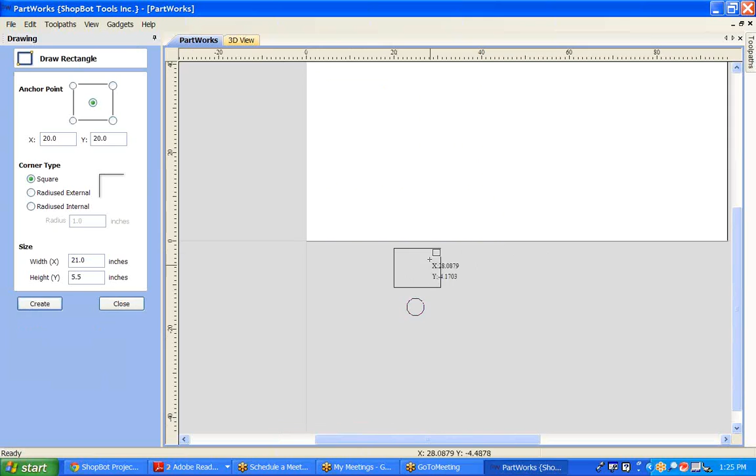Sitting on that stool, I know right here 0,0. Here's the corner of my machine, the front. Here's where it's open in the Y, where you load your material on, and then it lays across right there. So that's been helpful too for getting set up for orientation at first, because there's no fun to have drawn this. Say you've drawn this nice project like this up and down. You drew it here, but then when you actually go out, your plywood grain goes that way, and you've got it laid out there like that, and you're up here cutting in no man's land, and you just wrecked your sheet.

Dust. What's the dust question? I just see dust. Oh, dust on the computer.

Yeah, it's inevitable. Unless you have some kind of a housing or something away here, the computer does get trashed. But after every cut, I usually blow off my table and clean it off. And I just take my air hose and blow the computer out too. And really, too, if you're looking into computers for operating your machine, you don't need anything fancy. You want something basic that'll run the ShopBot software, run PartWorks, in case you got to change something real quick. But you want everything else off that. You want the screensaver shut off. You want the internet shut off. You don't want anything Wi-Fi going on. All that stuff is just a way for you to get a disconnect and a headache and angry. So I shut all that stuff off. I turn everything off.

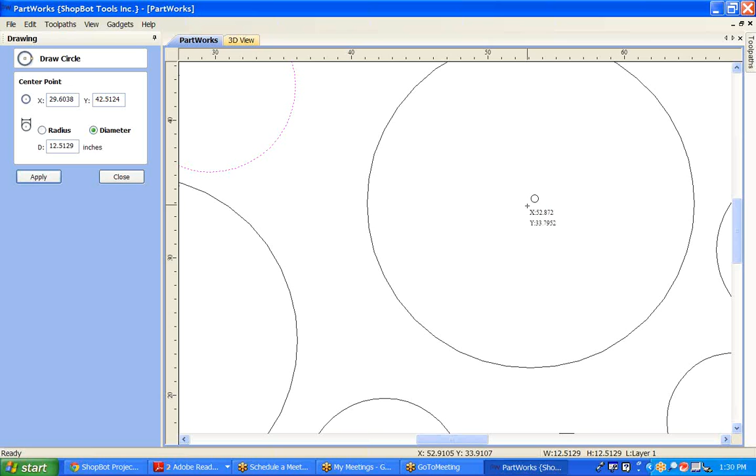I'm also able to zoom in to a circle, and if I hover over the center of the circle, see how it changes to a bullseye. Let me do it on smaller ones, a little easier - see how it switches to that bullseye? Now I can drag that up, and it perfectly centers it in there.

So that's nice, but say I drag this one and I want this circle to a specific size. Even if I've completely let go of it, I can always click back on a circle, go back up to draw a circle, and give it a specific size. I needed that at 5 inches - I can hit 5 and hit apply, and it'll change it for you.

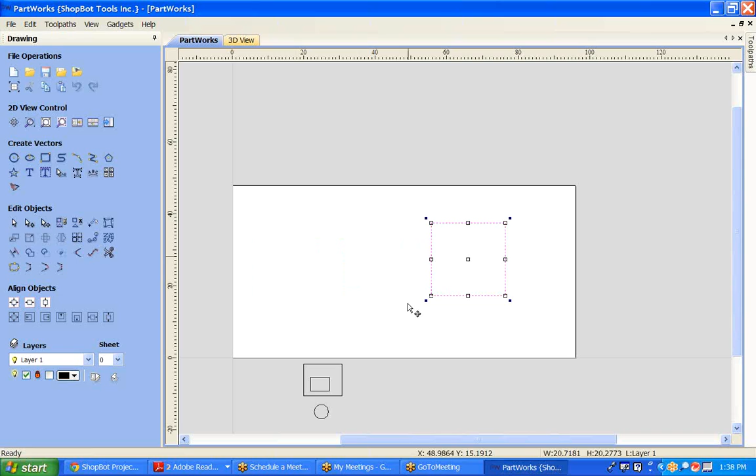This is one of my things that really gets overlooked a lot down here, just align objects. Say we have just a random rectangle drawn. I think I hit create twice there, so let me double click and move it to find out. Nope, okay, and here's just some.

I can cover your triangle question by doing it like this: Polygon, I can just say 3 sides, and boom, it creates my triangle. We can come back to that one - that's just a 3-sided polygon, the triangle.

So say I've got these multiple shapes and I want to align them up with each other. Down here in align objects, your top 3 options align objects in the material. So if I click on an object and select center in material, bang, it centers itself right in the material. But say I have this object down at 0, 0.

And I'm trying to get this triangle located in it. I could be sitting here with my arrow keys getting it close by eye, but there's no way I'm going to get it exact. So that's where it's nice to have these other align objects - these are for aligning objects within each other.

The way these work is: I want to move the triangle, so I select that first. Where do I want to move it to? I want to move it to the square. So with the triangle selected, I hold the shift key down and select the square. Now I come over here to align objects and find the one I want - do I want it to the top, the bottom? I actually just want it centered. So bang, it puts it perfectly centered in the middle. No matter the size of the shape, complex or not, you can do that.

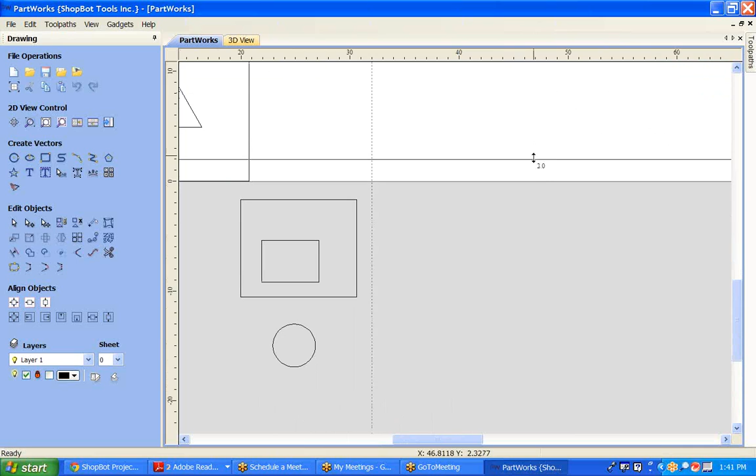So now this is nice - I like this one for setting borders around my material. Like I know I don't want to cut within 3/4 of an inch or 1 inch of my material, so I'll come in and put these all 1 inch off. Or I know this is 48, I'll set it at 47, and I'll set one at 95. So now when I'm drawing, I need to make sure I'm keeping this drawing down inside these, that way I've got room out here for a hold down.

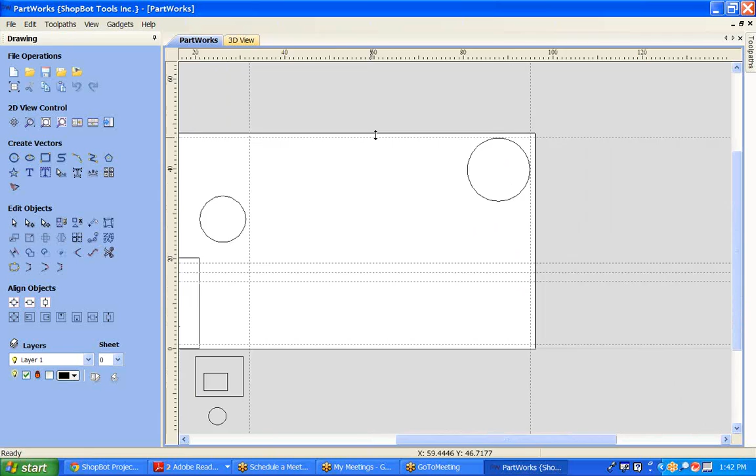So I think that answered some of your guys' drawings. And layout lines - you get into doing layout lines and stuff too to help get things exact.

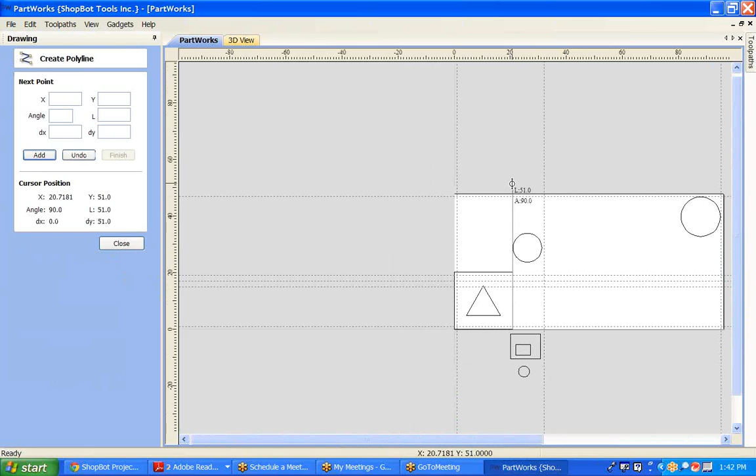If I wanted the circle on the same plane as this rectangle, I'd draw a line from the 0 point. Now instead of drawing this reference line where I want it, up at 90 degrees, and trying to fidget this guy over to get it lined up with that line, all I would have had to do was not even bother with the line.

I'm sorry, the delete key is in a different spot on this machine, it's my page up. So we'll just delete this out of here. All they would have had to do is say, hey, I want this guy brought over to that edge, depending on where you wanted it. So you can move it around to so many different spots - it's just the align objects function.

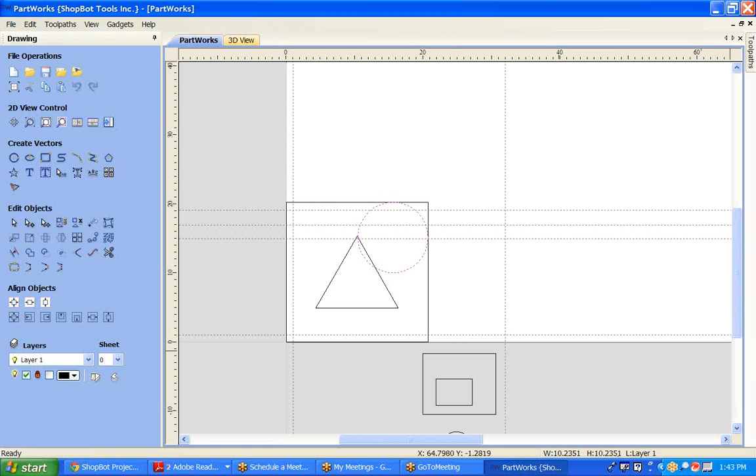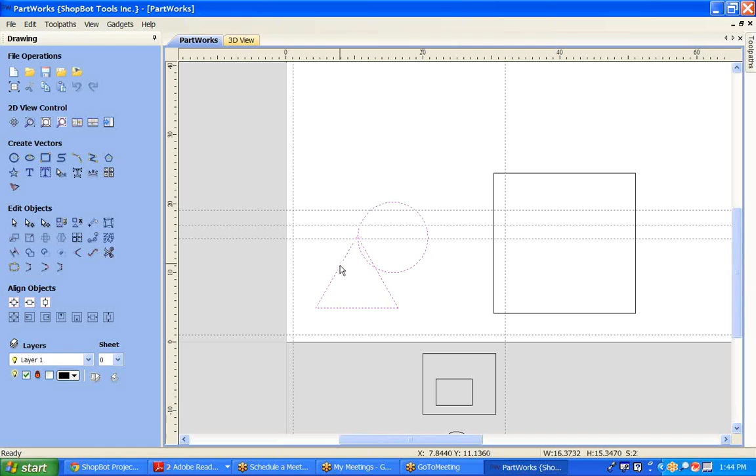Okay, what if the circle is sitting on top of the triangle, and then you want them centered in the square? I think this is what you're asking - you want what if the circle is sitting on top of the triangle. So let's make the circle, get it centered, and get it on top.

So for this one I'd actually have to get these layout lines out of here. I come in here with a quick drawing line, grab the top of this, come across here at a 0 angle, just a random length, just a drawing line. Now I'm going to say circle, I want you to go to that level, down, and now I want the circle to come over and be centered left and right on top of that. Then just go in there and get rid of that drawing line. So now they're exactly on top of each other.

Make this a little bit bigger so it fits. If you're going to move these together now, you're going to want to group them together. Watch, if we do this and say move over to here, it's going to put them like that - I want it to stay on top. So what I would actually do is highlight them, and this is where you'll see over here we have 'group selected objects', or you use shortcut keys from the 200-page manual we've all read. Actually just hit group those together, and then center them in there.

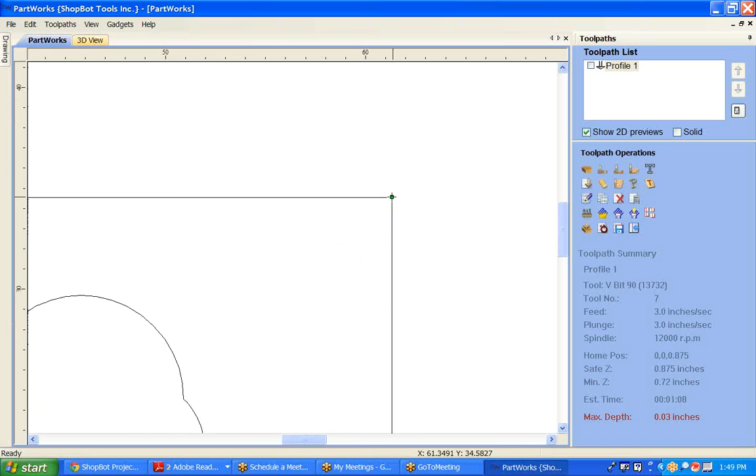So what it's saying is, if I went and toolpathed this, say I was going to give it my profile toolpath, and I preview it, it actually starts it up there when it previews it out. So this is the start of that toolpath right here. It's saying it's going to start here and then move around.

So sometimes you want to move the start points to certain spots. That's where you go in here and say, I really want it down here in this corner. I can right-click on it and go Make Start Point.

Notice in here too, even in node editing, all these little quick commands, S for smooth the point, C for cut vector. Until you have these memorized, go up here into the help contents. I haven't read that any more than the rest of us read the whole thing, but I do know if you navigate down to node editing, it gives you a printout, an option where you can see all these.

What I've also done is gone to the very last pages and I keep this printed out, these quick commands. Oh, there it is for node editing, the IDs, it's all right here. I have this all printed out, shows you how often I use it, and I keep it by our training computer so when people are in here training they can use this. So it's really helpful to go print that out.

But node editing is great. I like to come in here and really get custom with some stuff, make this a Bezier curve, or add some designs to it that you wouldn't be able to do in just a regular drawing.

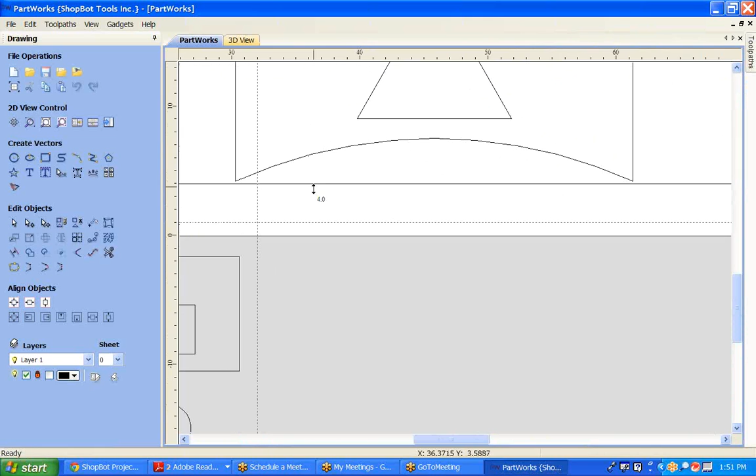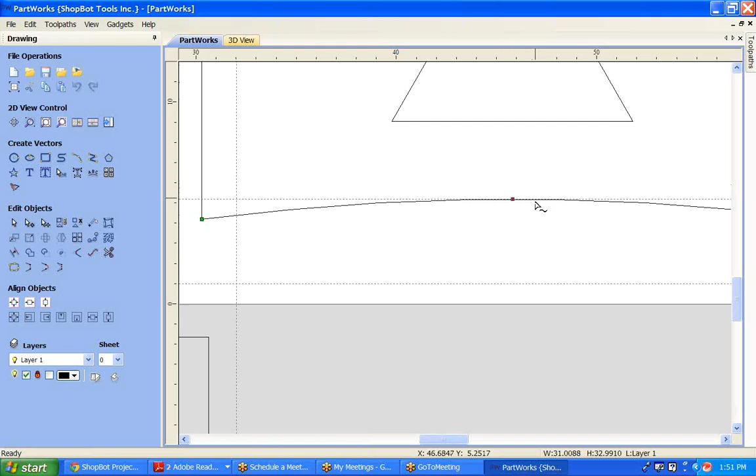Convert to an arc. You can come down and grab this arc and bring it to a specific dimension. Again, you could turn your layout lines back on and have a layout line at the bottom of this, and then offset one up. That's at 4.2, I want this at 5.2, so I know that's 1 inch up. Hit apply, it moves. Say, well, that's all I wanted that arc to have was 1 inch. So I go back into node editing, and I can drag that down to snap, and it snaps right to the 1 inch. So you're able to do that.

Again, to switch back and forth to node real fast is just the N key. So I got the regular cursor, it's pink, I hit N, boom, it switches straight to node. So that's another helpful thing, is that node editing, quickly going back and forth.

Now notice this too. Remember how before I was showing you we can always go back into rectangle and change the shape? I can click on this rectangle and go back in and actually modify its size and position. I can do all that. However, once I've now node edited this, notice how it's pink dashed lines, it's a selected vector. As soon as I go in here to draw a rectangle, it drops that off and makes it black again. Once you've node edited it and changed it, you can't go back to it. You'll have to redraw a new rectangle. You've lost that option. But until you've done that, you can always come back in and modify these.

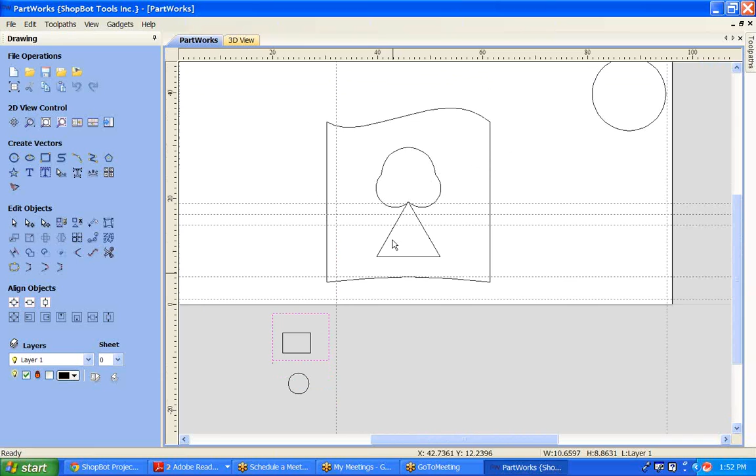I know you wanted to see a triangle real quick, and I kind of did that, but I just went in here to draw a polygon. I could draw polylines and give it specific angles, or just do freehand ones, or I can go into polygons, tell it I want a number of sides and a radius. Set the radius, set the center point, and it pops that out for us. The center of that is 12, 12.

Another feature that kind of gets forgotten in here is some of the math we're able to put in. Any of these fields where we can physically type a number, you're able to do what I'm about to do. So say right now I've got a 6-inch by 6-inch size, and there's my 6 by 6 square.

But it actually needs to be 6 3/16 by 6 3/16. So I can highlight it, go up here, draw a rectangle, and it shows me it's 6 by 6. But I really needed it to be 6 3/16, and I don't have my handy dandy ShopBot mouse pad with all the equivalencies, and it's been so long since I did the 3/16 decimal that I don't want to get a calculator out. You're able to come in here and do a little bit of math. So I can type 6 plus 3 divided by 16 equals, and it pops it out for you. That's a real nice feature.

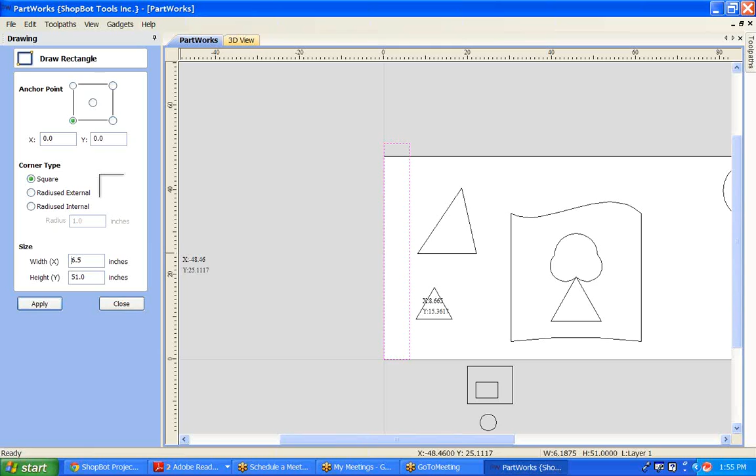Another thing you could do is say you had, I don't know, 4 feet plus 3 inches equals - there, it converts it to 51 inches, and when I hit apply, it brings that in. So you're able to type in different math situations. Like, what would 6.5 be? I can't quite comprehend that today, so I could just go 6 plus 1 divided by 2 equal signs, and it does it for you. It's great, it's awesome, I love doing that. I bet you get into some little fractions and stuff - it's really helpful.

Decimal fraction check, layout lines check. We did some sweep selects and some align objects.

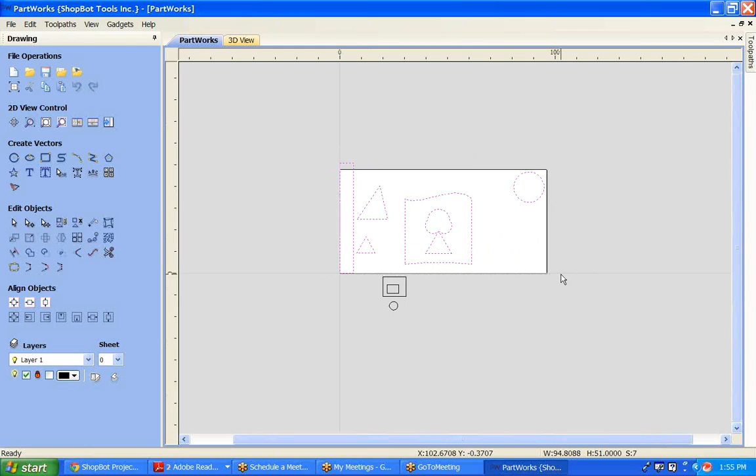All right, we got someone here who wants to see some nesting. So nesting is very nice - the nesting part of the software is very useful. Let's just go in here and create a part that we need nested.

Say I've got a guy that's brought me this random size here. I'm going to go 10 by 10 square, and in the center of this square is a circle - this is the part that needs to be cut out. This hole needs to be cut out in the middle, and then a profile around the side. This part here is what he needs to keep. And he says, here's my design, here's the size of the material I'll be cutting.

How many can you fit in a sheet, and how long will it take to cut it out? Give me some time estimates here - so we're kind of estimating a job. So one thing I want to do is, since I want that part held together, I want these to stay in the same spot - I don't want them moving around within each other. So I can reverse sweep select them, and I can either hit G or come over here and hit group. Now from the pink dash line, they become a pink solid line, so whatever gets modified or moved, it gets modified together. That's one part essentially - they don't ever change.

So now that we've got our actual part, we need to figure out for our customer how many of these we're going to fit into this sheet. And that's what's so nice about having this built into our software - in Edit Objects, if you go down to the second row, all the way over, it says Nest Selected Vectors. You can even see they got creative with the word nesting and have all the letters nested in there.

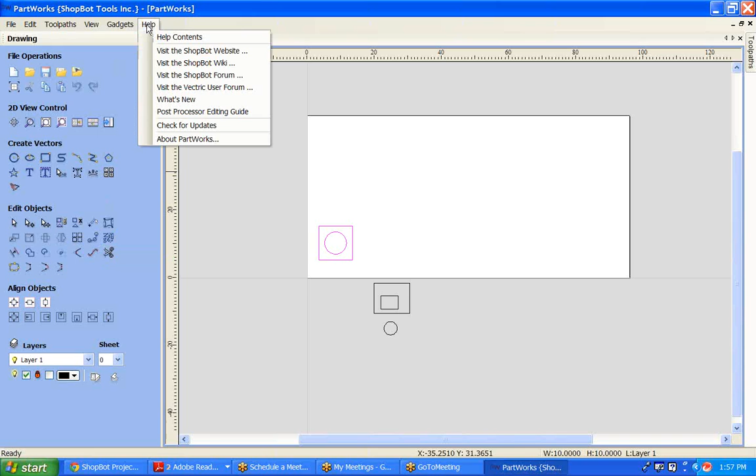There's a great thing about nesting. If you go into Help Contents, there's a whole thing on nesting in here, and there's also a whole thing about it on the actual training site for Vectric that I was showing you earlier. So you have both of those, and what we're going to do right here—if you ever need to go reference it again.

So let's go into nesting, and it's going to run us through a few job setup questions. What size diameter bit are you using? Say we just have a 1/4 inch bit. I can just type in my decimal, or since I can't quite comprehend how difficult that conversion is, I can go 1 divided by 4 equals, and it pops that out right there for me.

Clearance gap—that's what we have to have in between the parts. We know we're going to have several of these, but we also know we're going to have a 1/4 inch bit running around, and we need some distance in between, some material to stay in there. That's where I set my clearance gap. I changed it back—I want a 0.25 clearance gap. Let's say we'll put 3/4 of an inch in there right now. We're going to have a 1/4 inch cutout on this side, 1/4 inch on that, and we need a little bit of space in there to tab.

And then border—how much do we want left all around the border here? I'll just give it 1 inch right now.

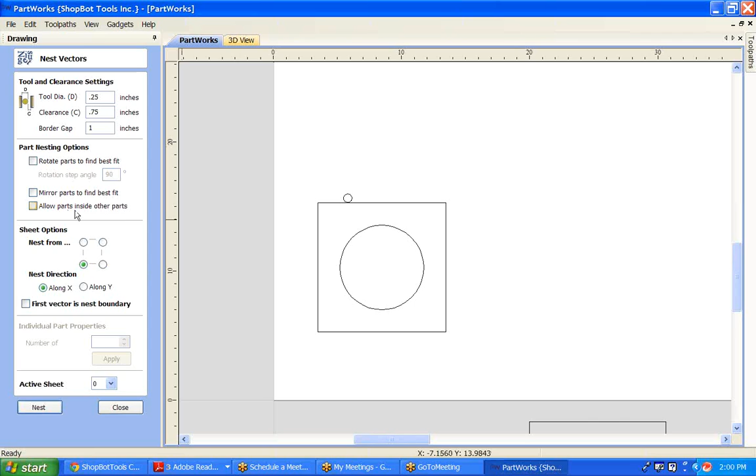And allow parts to fit inside other parts. Say we know this circle right here is getting cut out and just going to get scrapped—maybe we have another smaller part that we need to cut out, and you could actually have it nest inside here. I've done that on several projects. If you go to our ready to cut projects, you'll see the one called the ShopBot Smokehouse, and I needed every inch of that 4-foot by 8-foot sheet. Inside the door cutouts, you'll see some actual parts that have been hidden, nested inside another part. Let me get rid of this part here—I don't need that. And this is the one I wanted.

And right here, this is where you can say where do you want it to nest from. I'm just going to say the bottom corner and nest either in the X or the Y. Right now we kind of need a rough estimate—how many do we think? I don't know, I'm going to say I can get 20 out of here, just for grins. And I have to hit Apply.

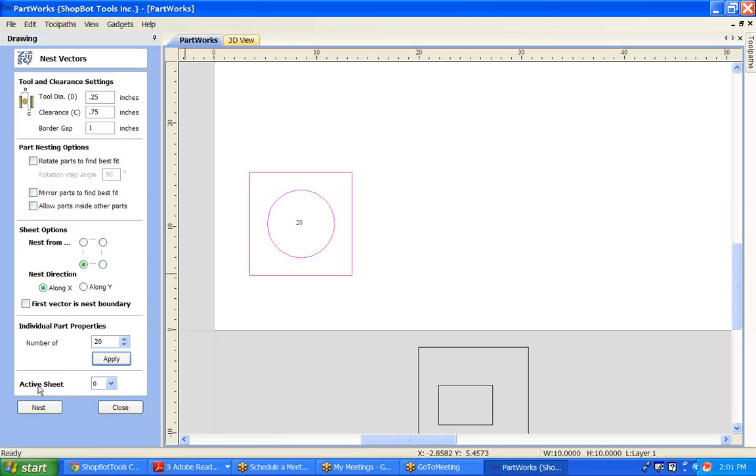When I hit Apply, it actually assigns a number. Now, for you guys watching this in 2013, the new version of PartWorks and Aspire has a preview button right here—it says Preview Nest. I believe it did; I'm trying to remember back to our training up in Cincinnati where I could preview it. Now I have to hit Nest. Oh, no suitable vectors—I need to select the vectors and now hit Nest. So it shows no problem. I hit 20, so I know I could probably get 4, 8, 12 more.

Let's go 15 just to show you what happens if we have too many. I hit Control Z, which is the same as going Edit, Undo, Delete—or undo, whatever you had to undo. And I'm going to actually change this to 35, hit Apply, and then hit Nest.

Now you see I've got sheet 1 created here, and I see that I've got 3 extra ones over here. So I don't, I can't fit that many on there.

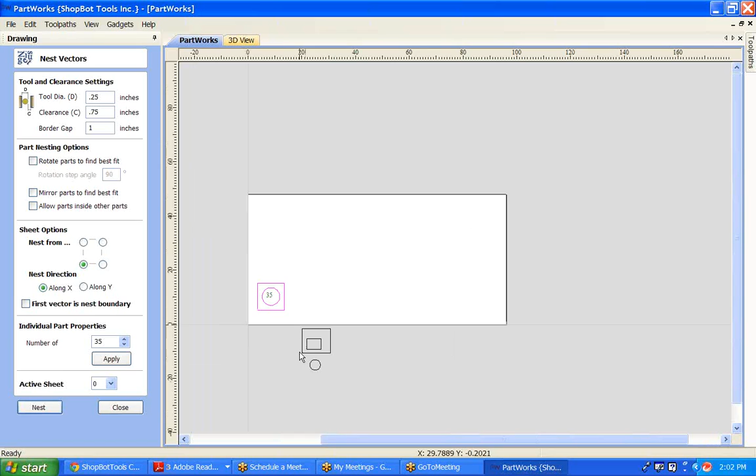So what I would actually do is do it again, Edit, Undo, or Control Z. That's my favorite command on this software, and it's my own fault. So I would actually go in there and type in 3 less, which is 32. Or again, I could do the whole math part. But I got to hit Apply so it changes, then I hit Nest, and boom, there they are. There's my 32, fit perfect.

So I can come now in here, hit Close, and don't forget we have this measuring tool right here, and I can go in here and confirm that I leave enough distance in between. I drag it across. That's 1 inch. Am I okay with 1 inch?

Well, why don't I just draw a quick little thing? I know my bit is 0.25, so I'm just going to drop in a couple of little 0.25 circles to show that I'm going to be cutting out here, and I'll be cutting out here. Look at all that distance I have in between. I definitely am safe, so I feel good about the nest.

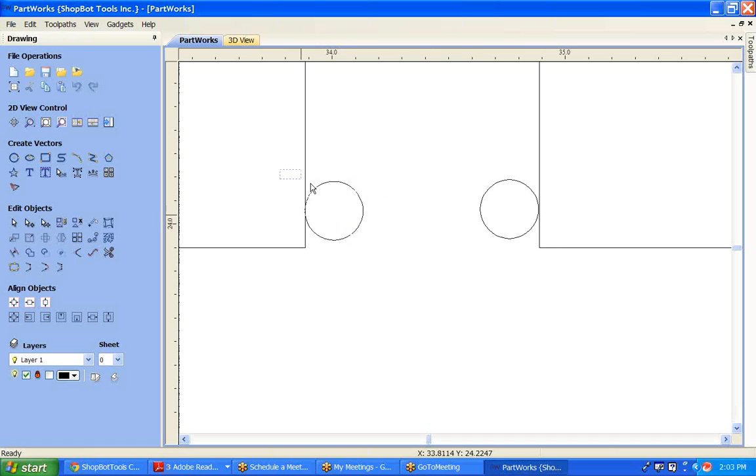But what about this? I could also center this in the part a little bit more. There's no reason to having... I mean, what am I going to do with the 6-inch piece right here? If I don't need that per se, I can sweep select them all, and I can say align and center, and boom, it centers it in. Now I've got plenty of room around here for hold down.

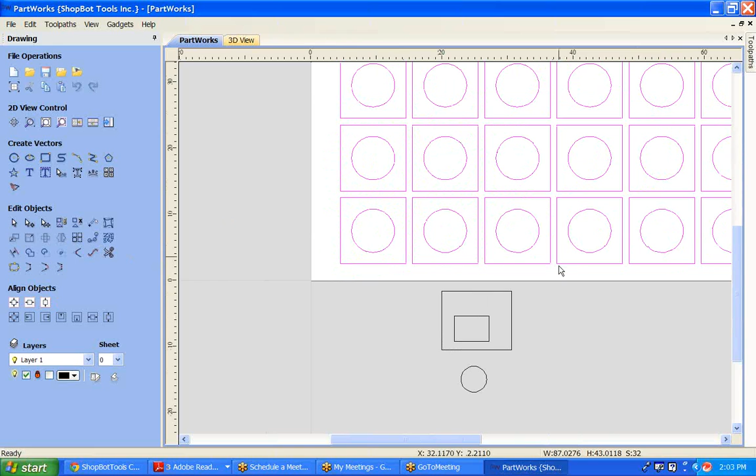Or maybe I need some hold down in the middle, and I know I've got room to spare, so maybe I'll just take this half and use my arrow keys and nudge these over, and maybe grab these here and nudge these over. So now I've got plenty of room in between here. In between here, I could run some screws in if I had to do some hold down.

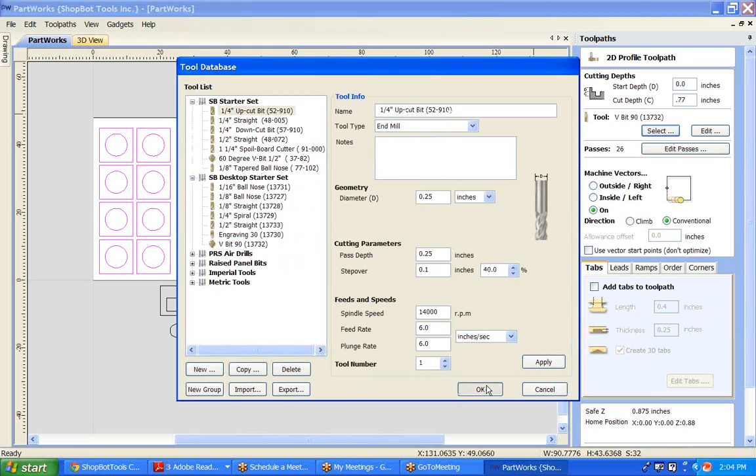And then from here I would go—and I'll come to the tool pathing later—but I would just quickly put a tool path to this. I had 0.75, go a little bit deeper, select, I said a 1/4 inch, and say I set all the parameters up exact. I would run it, preview all the tool paths, make sure I was happy with them, and get an estimated time. About 28 minutes to do that many pieces.

So again, I didn't get into specifics of adding tabs or ramps or any of that. It's stuff we can come back to, but just to give you a gist of nesting. So that is the nest. Sometimes nesting will do the best for you and fit parts. Sometimes I've been able to outsmart the nest and actually do the nest and then sneak in a few more parts. But in this case, it did a perfect job and got our parts in there.

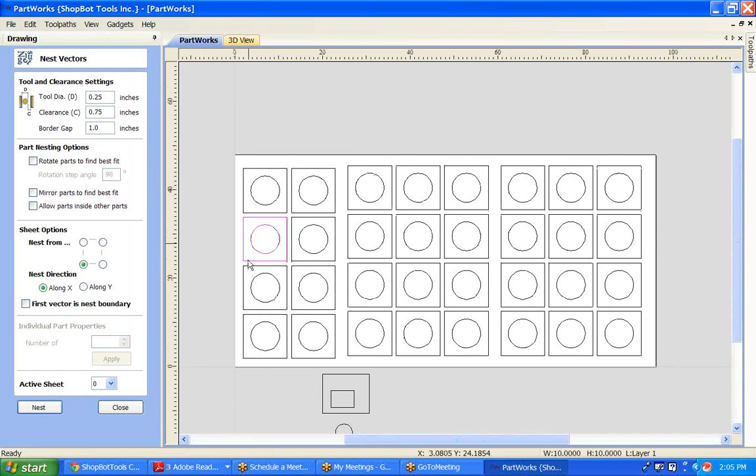So that is nesting. A couple of drawing commands get overlooked a lot and forgotten, but are still somewhat useful. Say we wanted to make a sign with multiple shapes in it—this one I find gets overlooked quite a bit. So there's my long part of the sign, and maybe I want to have some sort of a circular part in the middle.

And I can just sweep select them. I can have them centered. I didn't quite center the way I wanted it, so I center that in the middle. I center that in the middle.

So here's my parts. A lot of us are used to going over here and using the scissors, which is trim vectors. I would go right here, and here's 1, 2—whoops, I don't want that, it trimmed it right off. That trims it off too. I'm just hitting here, undoing and trimming, undoing and trimming. It can be a pain sometimes.

What is real nice to have is I can just have both objects selected, and you can come down here to weld selected vectors, subtract vectors, or keep overlap. So if I weld selected vectors, bang, that's just become my one new design right there, which is really useful. Now I could come in here and add my stuff as text or 3D or whatever I needed to do. So if I do an edit undo, let's see what happens on these other ones.

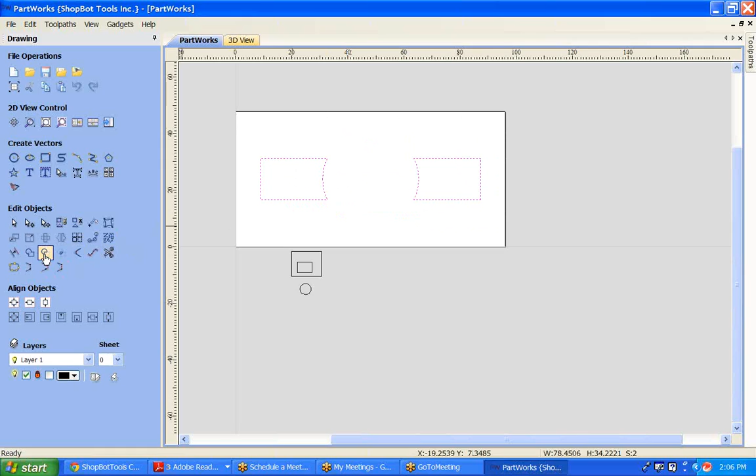Now that was the subtract vector, so it subtracted where they overlapped. And this one here would be keep overlap. So just some useful stuff to remember, things that get overlooked and forgotten.

So, weld selected vectors. I got a question here that says, can a PartWorks file be saved as a DXF? So yeah, this is my project right here, let's say, and I'm done with this. I can come up, highlight this, go to file, and actually export it out as a DXF right there.

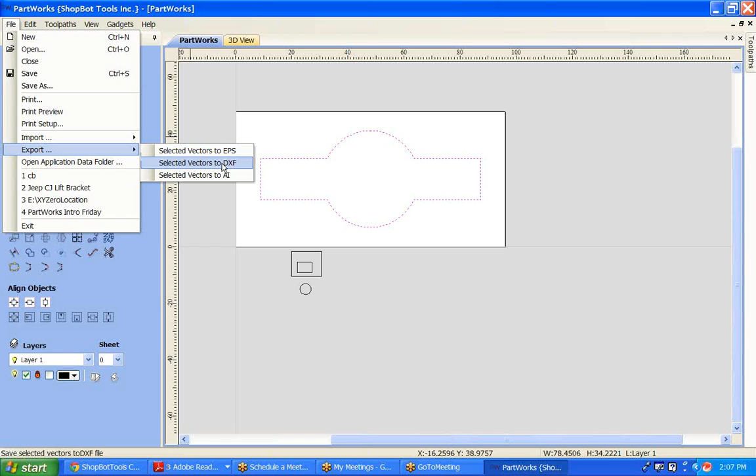I hope that answers your question, Gary. Again, these are all things that we've done in your basic training. You use them, but certain ones just get forgotten. We haven't used them in a long time, or it's just something that maybe is a little bit quicker for you to draw. And some of you guys might have a couple of these techniques that I haven't even been covering that you might want to go over.

Go back to node editing real quick. This is one that we forget about a lot. Say I'm in here and I've right-clicked on this and I've deleted a span. Well, we know that we can also right-click and say close vector with a line, a smooth curve, or move endpoints. So, boom, I've selected it, and I've brought it right back in there.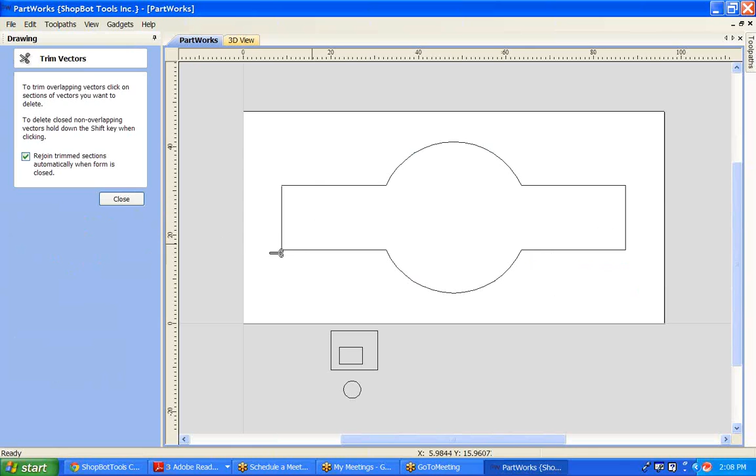Some other ones as we're drawing... oh, it's not going to grab over there. So say I went in here and cut the vector, and I've actually gone and eliminated this part of the project out.

Even not in node editing, there are objects that you can come over here - these bottom three - and join or close with a straight line, with a smooth curve, or to move a common toolpath. So same thing that's in the node, you don't have to go in there to find it, you can do it right there.

So edit, undo, and it just shows the different options, versus me having to come up here. Say I just want a straight line, I've got to draw a polyline. There's a click, here's a click, there's a click. So did I even get the ends right? No. So now I've got to come in here and do a trim, then check - did it get joined, is it closed? Yes, it's closed. Or, what I could have just had was right here - it says join/close vectors with a straight line. So when it's highlighted, it's one click and done versus all the other clicks.

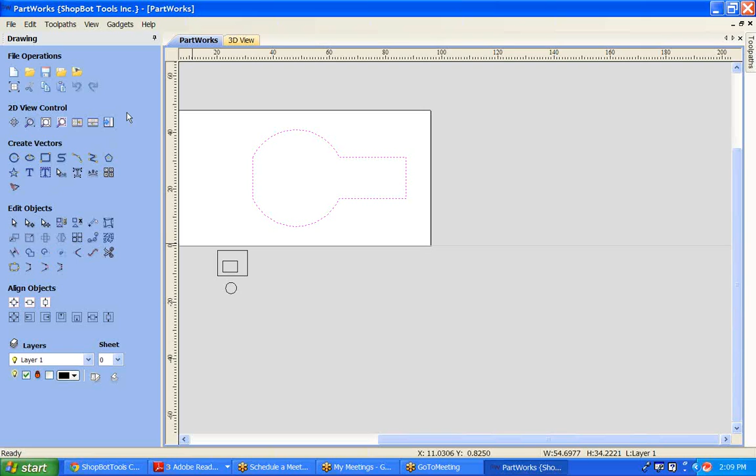All right, let's see what we have for some questions here. I'm working with text and trying to cut profiles of a script that I string together, but I seem to have too many start points and the end points seem too. Text on curve - can you do that with holes?

All right, so we've got some text questions here we're getting into.

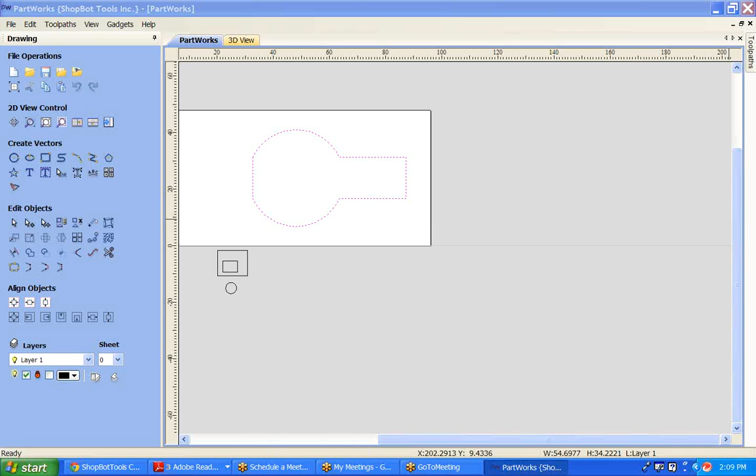So first of all, text can be a little tricky sometimes, and let's just remember that when we're drawing with text - sorry, the computer's loading up - when we actually come in here and draw or create text, what we can do is create the text, give it our specific font, bold it, center it, whatever we want to do, change the height. We can do all that, give it an anchor point. But I'm also, just like I was up here with the circles and the rectangles, able to come in here, move it, and drag it to whatever size. But notice how when text comes in, versus coming in as just an individual vector which is your dashed pink line, it's coming in as a solid line. So text is grouped together, it's already been grouped, so it needs to stay as a group for V-carving purposes. Once it's broken up into individuals, it's not going to V-carve the same.

And I know I'm getting a boatload of questions over here, and I will go back to them. If I've skipped them, I will come back. I apologize, but they are just showing up like crazy in the little chat window, which is perfect.

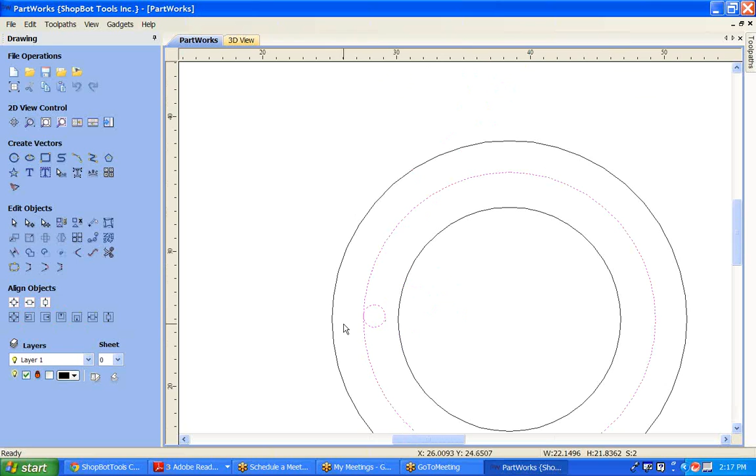That's where I want those. What I could actually do is copy objects along vectors. I could say, copy these circles, give it a number... oops, sorry. Copy those. I want to copy it around this.

I should drop it in there. Oops, I had the size wrong. So this one is actually copying circles, but I wanted to copy the object. So I'd say copy this to this.

Copy the object. I want 6 of them, I want 12 of them. And I hit copy, and boom, it drops them in exactly along there. I didn't even have to line it up, it lined it all up itself for me. So I go in here and delete the original, delete the layout line, and there's my part right there.

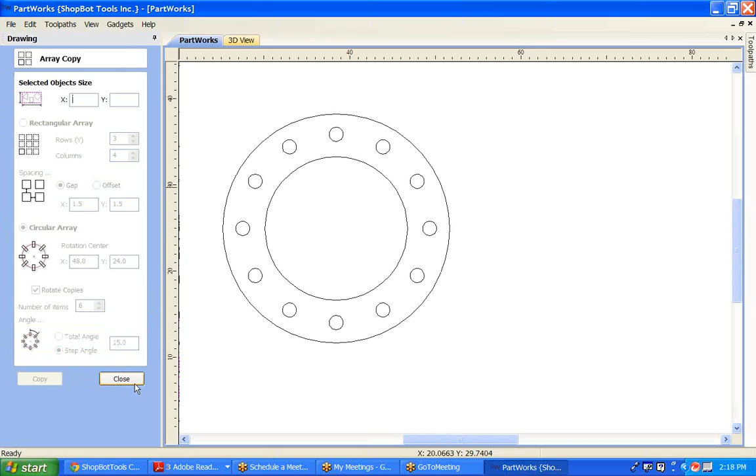You can do that same thing without doing it in a circular array. I could have went in here and, let's say I want to keep this—this is neat, maybe I'll use this for something in a little bit—I just drag it over here into no man's land. It can hang out, it's not hurting anybody over there. Same thing I just did with those circles.

If I wanted to create vectors in a linear pattern instead of circular, I just did that—where did I do that? I did copy objects along vectors. I can also come in here and copy objects in a linear or circular array. So it's a way to do that as well.

We'll do a rectangle for this one. So there's my selected object size. I want to do a rectangular array, and I just tell it how many columns I want. Say I want 6 columns and 5 rows, and I can give it a gap, or the spacing in between the X and the Y—give it an inch in between each. And I hit copy, and it copies those and makes them for me. It's so much faster than having to do any kind of copy and paste.

Some of these I'm going over a little quick. If you want, say, hey, slow down, show that again, just type that into me and I will make sure that I do that. I want to go slow, but I also want to go fast to cover as much as I can for you. You can always come back and watch it again. But I also have no problem coming back and showing this step over again. I think I'm getting a little fast because I've been trying to answer all these questions from getting caught up.

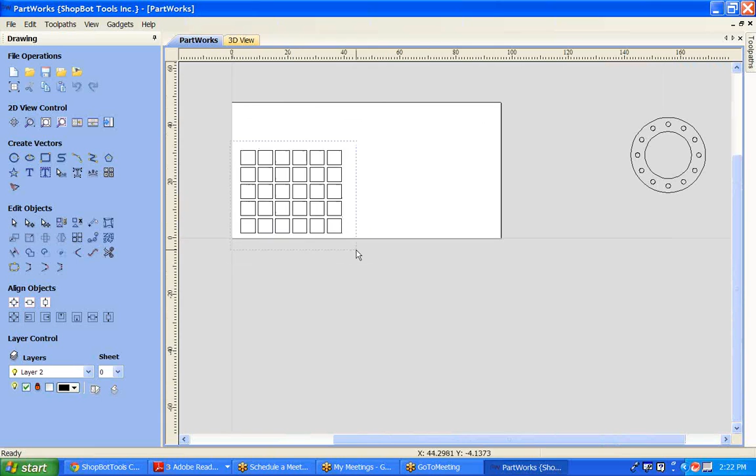So what he's asking is about converting a BMP file to a vector—BMP, JPEGs. What you can do is come up here to import a bitmap for tracing, and I click on this. I'm not sure if this computer has any pictures, let's go in here and see what we got. I think this is what you were asking for. So really what it's saying is it's bringing in a BMP, a JPEG, a GIF, a TIFF, a PNG—any of these different formats. I have no idea what some of these even are.

So I could bring this bitmap in, JPEG, or any of the following, and maybe I just want to trace the outline of the mountains for a background I want to put into my project, a cloud or something. Once I've used this import tracing, now I've got the picture. I actually need to trace it.

So in Create Vectors, go down to the third one, and that's where you can fit vectors to bitmap. Here's where we can pick color, black and white, and let's say I'll go color, and I just want to select with black right there.

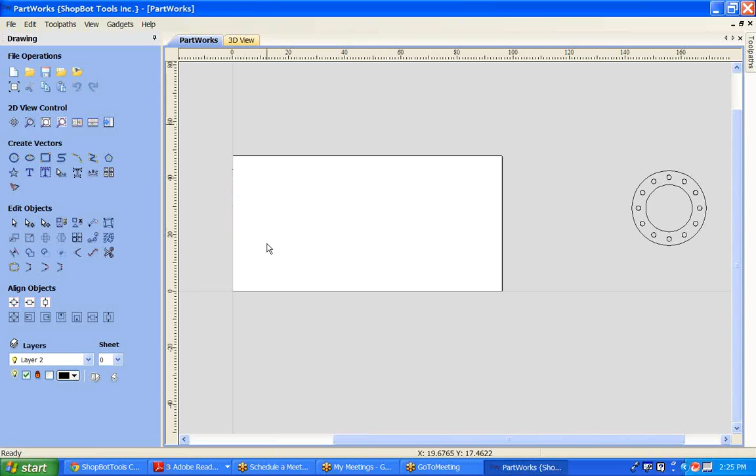What I've done several times is, even like a Google image of some clip art or something, or took a picture. The other day I took a picture of a guitar for a guy, saved it as a JPEG, came in here, imported the JPEG, had the guitar here, went in here and did trace, and it was just a couple colors, and I traced the guitar, and we ended up toolpathing it real quick.

So again, if you want a real detailed training on bitmap tracing, I would go to vectric.com and go down here to support and training material, and it's right in here in the 2D. He's got a great one for tracing and machining images, it's 11.5 minutes, and James does a great job with that, much better than I can do here. So that's where you can get going good with that.

All right, BMP to vector. I think I answered Larry's question. You can choose climb or conventional cut. Sometimes it is useful to do bidirectional, can you do that? I can, I'm going to come back to that when we're actually toolpathing, Gerald. I'm going to stick with the drawing for right now. I'll try to get you there.

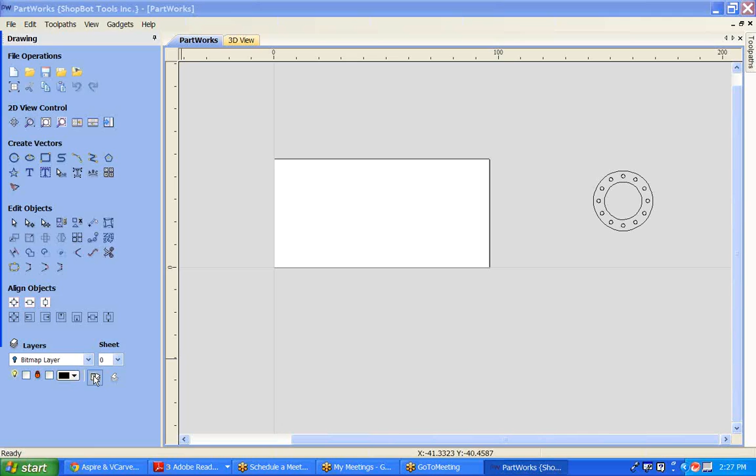What is layer 1 and layer 2 referred to? So what he's asking down here is layers, what layers I'm drawing on. Here's a bitmap layer, which I have turned off, and now the light's on. So you can actually draw on layers. And this, take it or leave it as you want.

It's what works for you. Maybe you have a project that has a bunch of holes in it, so you could actually draw all your holes on layer 1 and then have all your profiles on layer 2, or bitmaps on its own layer. So now I'm tired of looking at the holes, or tired of looking at the bitmap, I could just come in here and say, hey, turn you off. It's there still, I just don't see it right now. Or maybe I'm just done with that bitmap, thing didn't come out right, and I just want it gone. I can just hit delete layer.

Do I want to move to a different layer, or just say nope, delete, goodbye, and it's gone. So that's the layers. I wouldn't get too worried about layers yet. Get a dozen or two simpler projects under your belt before you worry about drawing stuff on multiple layers.

Will there be a class on the new ShopBot control software? Yeah, there will, once it's actually fully released. We have a new version of the ShopBot control software coming out within a few months.

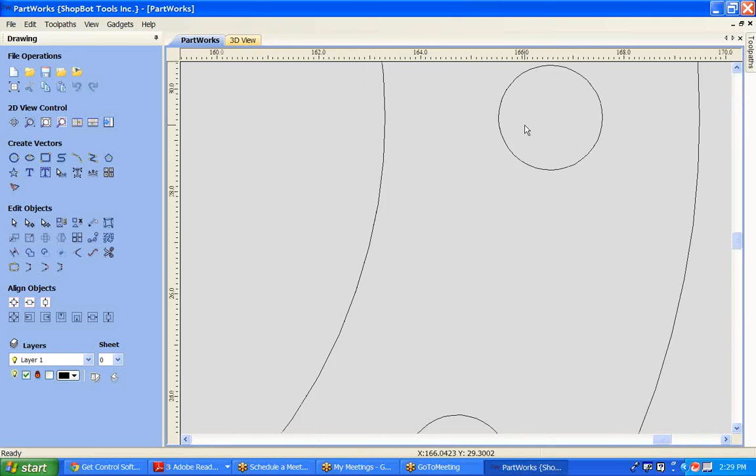This whole zooming and panning with the mouse is key. I'm using my scroll wheel, moving around, panning, scrolling in or out, or holding it to pan. It's real useful. Sweep select, if I want to sweep the whole thing, everything inside gets selected. With a reverse sweep select, it doesn't matter if it's fully engulfed, whatever it's touching is going to get selected.

If I want to grab things one by one, I can click on it, hold the Shift key, and go through clicking one by one. Which is slow. What I would actually do is sweep select the whole thing, hold down Shift, and click the parts I don't want to deselect those. Then I would group these together, or just hit G as a quick command. Remember, there's a help section with 217 pages you all have to read by the next webinar, because the first half hour will be a quiz on the help PDF. Not fair, I have to read it first too, right?

So grouped objects are solid paint, dashed ones are just individual vectors. Any other specific drawing questions? Otherwise we'll move over and do a little extra help on PartWorks, or the toolpath side. Today's session was just some forgotten tips and tricks that you might have used, some things to help speed things up and make you more confident and accurate. It wasn't meant to be an intro to how you draw in PartWorks and go at it, just some friendly tips we've all forgotten.

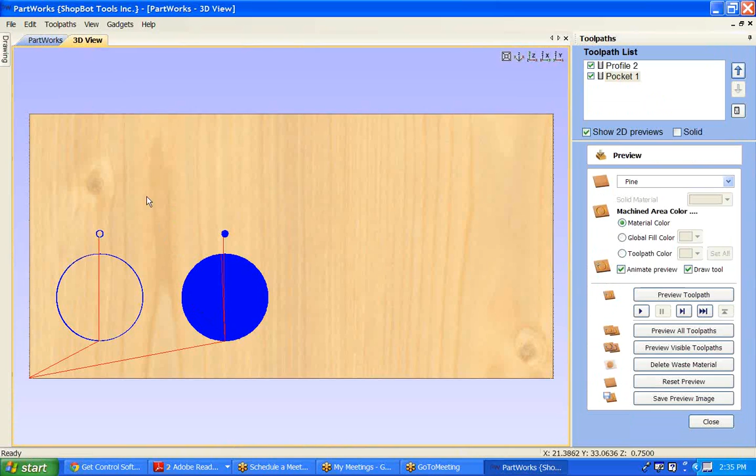Now let's come over here and make these a pocket. I'm actually going to do a pocket of 0.76—I want the same bit that I used. I'm just setting up a little visual here, so don't try to draw all this. Alright, so on the left we've got profiles, and on the right we've got pockets. So just to show you, sometimes you'll use a pocket as a profile for drawing holes.

And this is why, right here. Let's preview all the toolpaths. So as we see over here, the little hole done as a profile pass on the inside leaves this nub of wood. That little piece right there is probably only about a half inch by half inch—it's just a little tiny circle.

And what that is—if you're going to add a tab to that to hold it in place, once it's cut you've got to spend time removing the tab, sanding where the tab was, and cleaning that hole up. Where if I would have just done it as a pocket, it would have already been gone for me. So the pocket's going to take a little bit longer to cut out, but it's also going to save me the time it would have taken to sand this and untab it. And here's the chance of this little tiny piece flying out of there if I forgot to tab it or it broke off—it could chip a bit or break a bit.

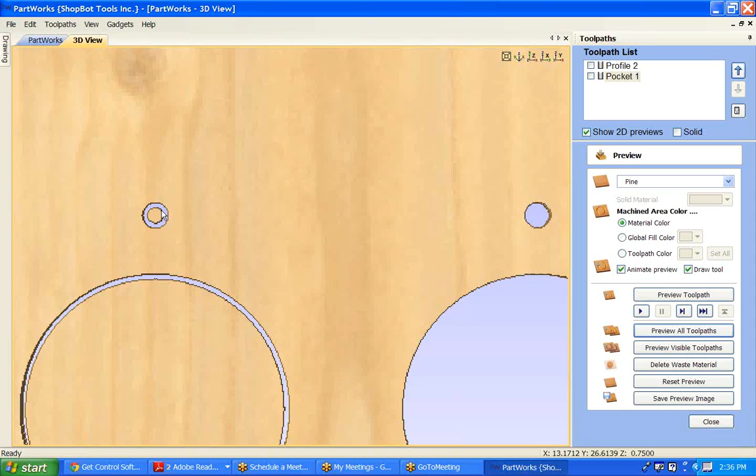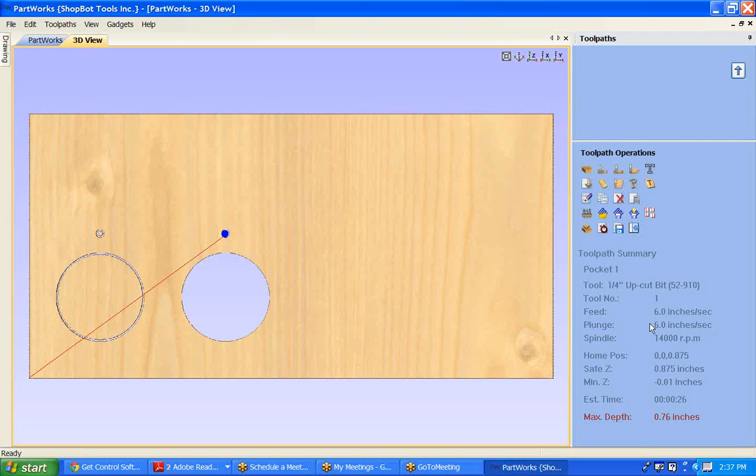So in an instance like this, let's say I want to redo this pocket—just this one pocketed, this little guy. It's telling me that's going to take 26 seconds. Where if I did it as the profile, it's actually going to take 10 seconds. So technically this profile is going to cut a heck of a lot quicker—it's 16 seconds quicker.

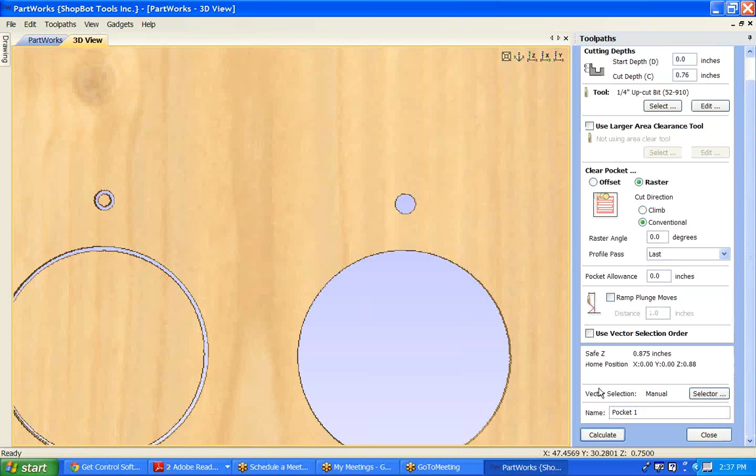But in 16 seconds, are you able to pop that tab out of there, clean up that edge, and take the risk of that breaking out of there? I don't think so. So for a little hole like this, it might be better to just do a pocket and set the depth to go all the way through. So it's a pocket, but it's really taking it all the way out because I've profiled it to go all the way through. In that instance, for a small hole, I would recommend using a pocket.

Now this big hole right here, let's go ahead and redo the toolpaths on these. So if I just profile it to the inside, it's going to give me the dimensions I want. This is where I'd add a tab to it so that it doesn't come flying out of there, and I calculate that, and that's fine.

And now I want to redo the pocket, so the pocket is inside as well. It's calculating, it's going to go all the way through. So let's reset, make sure we're right. Look at all this blue going on—that's all toolpathing. And this, see here, it's just going around the edge. So let's preview all the toolpaths.

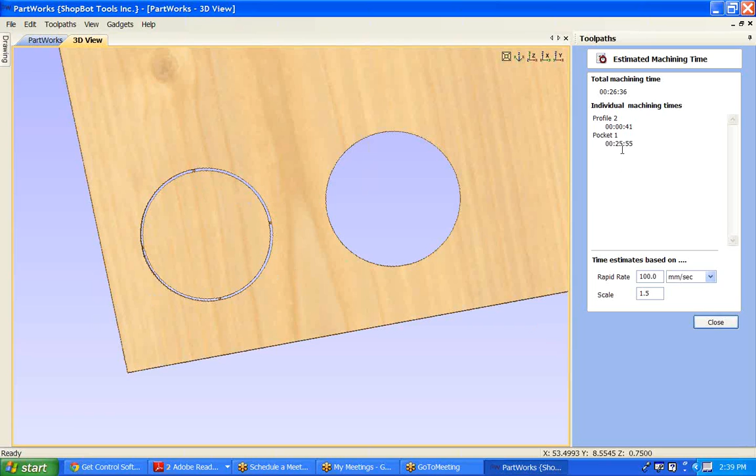Now I'm going to look at estimated machining time. I've got a 41-second profile with tabs, so 4 little tabs I just need to nip out. Or I've got a 26-minute pocket over here that ate up all the wood. This big circle, 12 inches in diameter, isn't going to come flying out with 4 tabs making one pass all the way around. It won't take much, once it's out, to go in there with a piece of sandpaper and clean up that tab. I can fit my hand in a 12-inch circle.

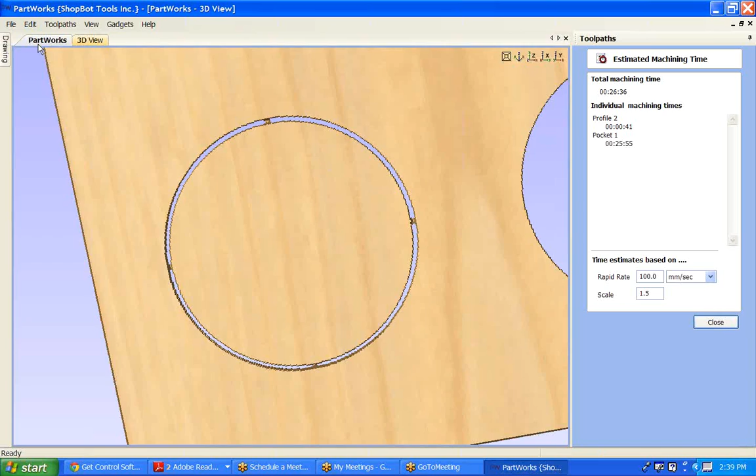But on the little ones, it's kind of the opposite. So think about that, draw this up and play around with it. When is it okay to use a pocket as a profile and a profile as a pocket? It depends on the size of the circle, the size of the hole. That's something I find really useful when toolpathing these projects. Do I really want that little nubby right in the middle that was right there, a little thing that's going to come flying out, or do I have to sit there and sand? No. So I would just take those holes, make them pockets, and set the depth to go all the way through.

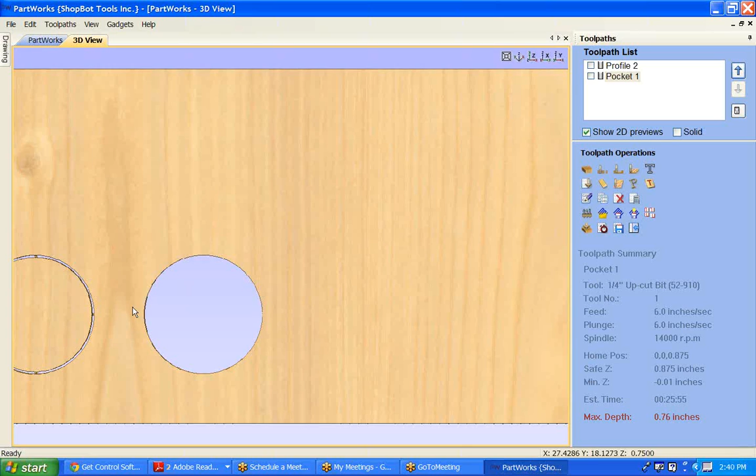Another thing that gets forgotten, and it's not crucial but nice to know: here's my drawing, and looking at the 3D, if you look down in the bottom right corner - I can't really move my mouse there or it'll disappear, but see where my mouse is right now? Watch when I have it highlighted over the board - it's actually telling me my X, my Y, and my Z location. So you can reference how far over is this second circle. I definitely needed a piece 44 inches wide to get over there. Notice the Z on top says 0.75, and as soon as I highlight over the hole, it's gone back down, it's gone. Same thing, you can highlight over your tabs and it'll show you the height of your tab too.

So, the estimated machine time is pretty crucial to know. I want to know how long my file is going to cut so I don't start it and then have to go to dinner while the machine's still going.

A lot of people also forget about this thing called the scale. Your machine might be set up a little differently than the next guy's - everybody has a different scale on their machine, but once you've got the scale set, you'll have this pretty much dialed in. What I recommend is, on one of your first simpler projects, maybe surfacing the table, as soon as you start the file, use a stopwatch and record it. Say we cut this file and recorded it, and it took 30 minutes exactly to cut, but here my total machining time says 26:36. So I can come in here and type in 1.6... 11.6... 1.6, getting closer... 1.7, right there, 30:06. So now I know I've got a scale of 1.7 that'll keep me pretty accurate, and that scale won't really change. It'll be accurate within 10-15 seconds, but that's just a comparison, a scale ratio that your software uses out on the machine. So the next file you come in, if it doesn't say 1.7, just change it to 1.7, or whatever yours ends up being - mine's 1.5. That estimated machine time is nice.

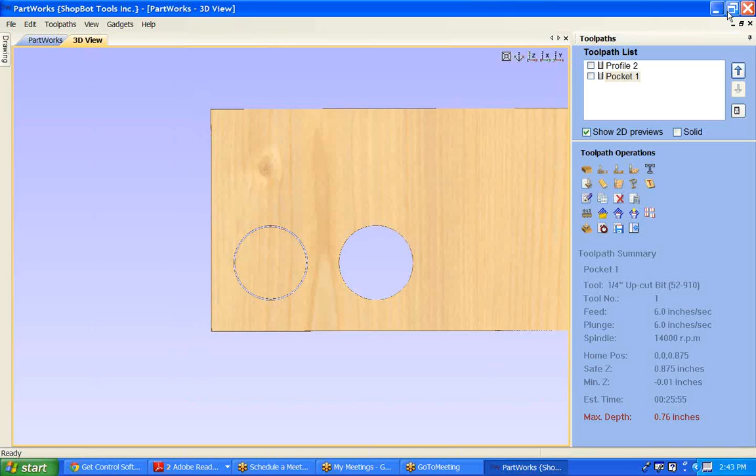So that's really it for the PartWorks stuff that I had that's helpful, that people seem to forget. A couple things up here in ShopBot 3 I'm going to go over real quick too.

I'm not hooked up to a ShopBot at all right now. I'm just loading it up, and you can do this and load it up in preview mode, run a file right here, and it'll pop out in preview mode and show you a 3D and 2D preview. So you always have right here the move cut or the preview, back and forth.

I'm going to do a whole training on this when the new software comes out, but that's not going to be released till early 2013. But a lot of people forget some of the simpler stuff that's in here.

If you go all the way over to help, one you can go down to is keyboard shortcuts. This one's really nice to have printed out, and I actually do keep this one next to my control box, next to my machine.

Say while you're running a file, you want to increase or decrease the move speed or the spindle speed - these show you shift plus or shift minus, you can increase or lower your spindle speed. That way you don't have to run back in and change the setting in your software. You could just decrease it from 14,000 down to 12,000 and write yourself a note to go in and change it on the file, but you don't want to necessarily shut the file off right then. So this is just a nice one to have printed out and keep next to you.

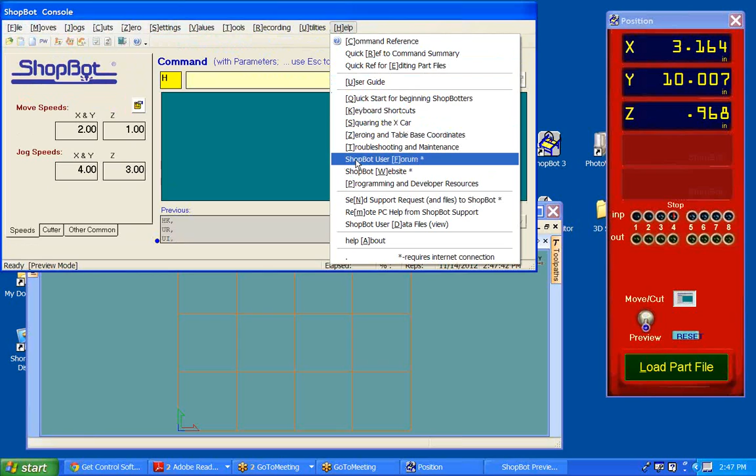Now here's a quick reference - click on that, takes you right over to the forum, brings up your browser. So we got an error there: the document requested is not found on the server. Well, that's good to know, I'll have to get that one fixed.

There's even a calculator built in. Look at that.

But I guess the main stuff for today was all in the Partworks or Aspire. Again, we talked about how they're the same thing besides the modeling software. The VCarve Pro is the exact same thing as Partworks, it just has a different name because we have an output to our ShopBot.

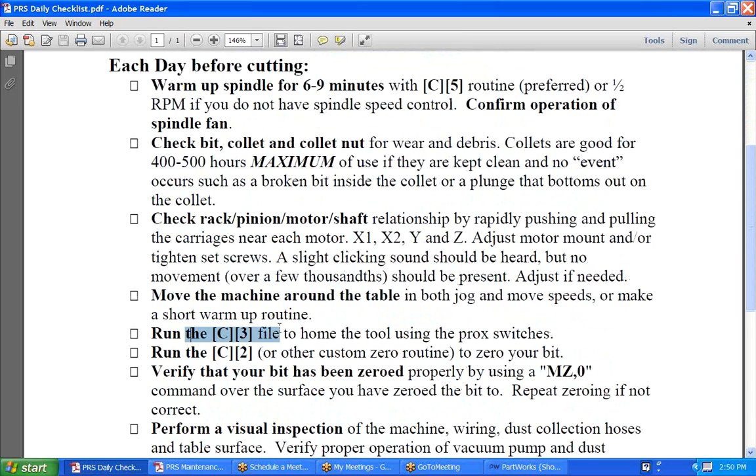Warm up your spindle first, which is a C5. Check your bit, check your collets, they only have a lifespan of so long. How to check your gantry. Do your homing routines to get your X, Y, and Z put together. So these are all real helpful ones, that's the daily checklist you should do. There's a monthly one you should be doing as well. Here they're both built into each other, but there's daily, 40 hours, quarterly, annually checklists - just real good information to help keep your machine tight and square and prolong the life of your rack and pinions and all that good stuff.

So besides your pinions and bits, that consumable stuff - everything else, you're going to be impressed with what kind of life you get out of it.

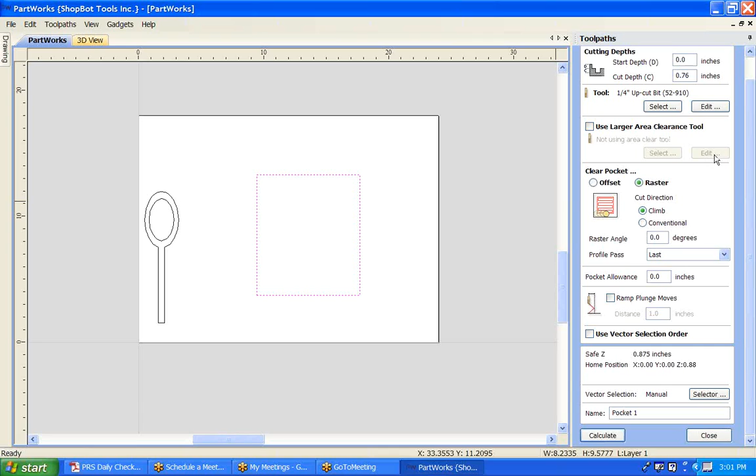I believe we can do this. So, offset - I can have it start in the middle or start on the outside. Raster, same thing, I have it selected for no profile. I have a profile thing at the end. So you can come in here and play with that - offset, raster, and climb conventional. That's all you're going to get for options for pocketing. So I would play around with them to see if you can do what you want. But the climb and the conventional switch the stop points back and forth.

How do you import a tool database from Partworks to Aspire? Well, first of all, you got to find out where you saved the darn thing.

Once you get one all set up, what I like to do is take this thing and save it or export it out, put it on a different jump drive, or put it in my documents, someplace where I can always come back to it.

Right now I could go in here and say, hey, I want to import. Maybe Doug sent me his toolpath with all his files for doing cabinets. So I might come in here and just go import, and then I'd have to find where the tools are saved. I believe if you go into my computer and look in the C drive for the tool database, it's somewhere under the Partworks program files, wherever your Partworks saves tools. I think it's called Tools.

So is it the top and bottom of the spoon? Is that what you're trying to do? Cut this like this today, then have these all cut out, flip them over, and cut the bottom side of the spoon, like the other end of it. Is that what you're getting at, Kevin?

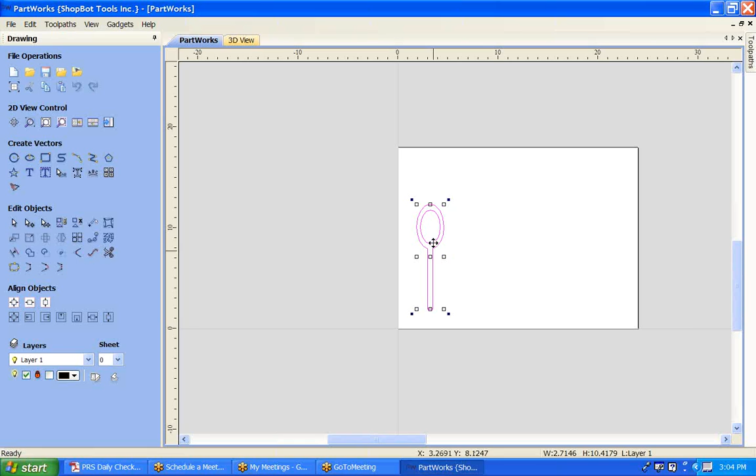What I'd end up doing is take my spoons and nest them in here, as many as I could. Then I'd also come in here and run that same file and make an actual profile of it, where instead of cutting on the outside, I'd cut on the inside. So then I'd actually have a fixture of all these spoons. Now when I go and cut spoons, they'll all sit right down on this fixture, so it doesn't matter - I can set the spoon with it up or with it down. That's how I would do that one.

So to just do it real quick to show you, let's just nest, I don't know, we'll just nest like 12 of these in here. Oops, I didn't hit apply.

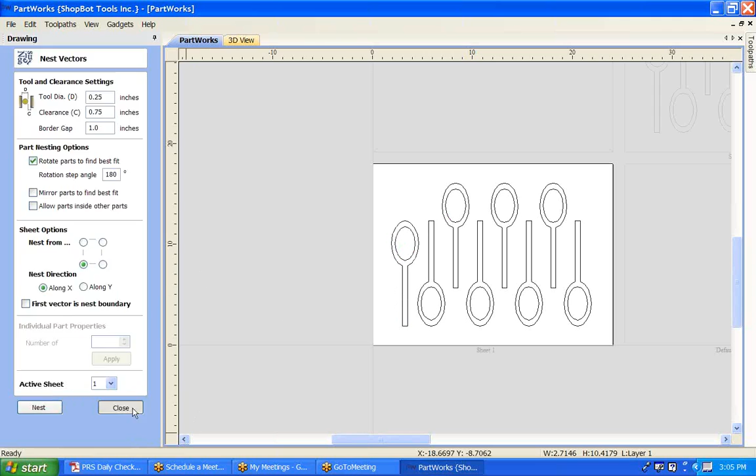So say I've got these right here. To cut the spoons out all day long, I would first just have a toolpath that profiles them on the outside. This would be just one file, my go-to file that I go to and cut all day long. Just boom, I'm cutting out spoons, that's great.

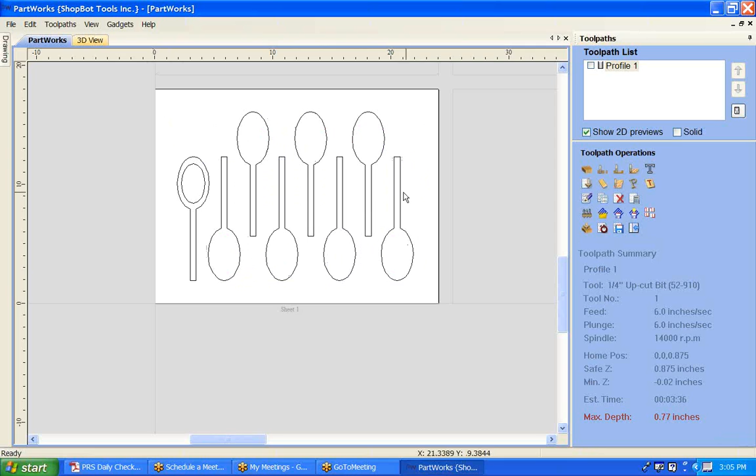But what I would do to make a fixture for this is I wouldn't need the insides for this. Because I would actually take these now and make a profile that cuts on the inside.

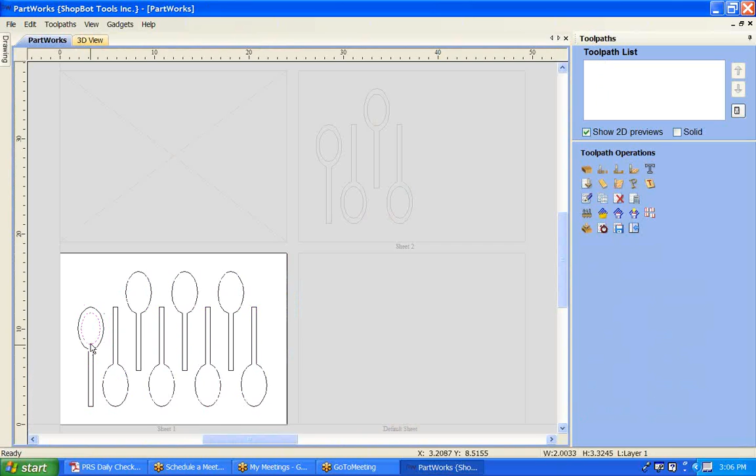So if you see this one, it cuts - see how the toolpath's in there a long ways? When I preview all toolpaths, it's a lot smaller of a hole now. I actually would have probably just pocketed all those out, gotten rid of all that inside mess, and then each of my spoons could lay down inside this thing. I wouldn't have made it all the way through either, I would have just one height.

I would have just pocketed these, say, 0.5, and then bang, there's a jig. It's always going to be the same, and you can just lay your spoons in there each time and run your existing toolpath over it. I made kiss drums like that.

Okay, Larry, so Larry's made it work. Kevin, I hope that answered you, brother. That's what I've done before when I made a lot of the same parts and had to monkey around with them.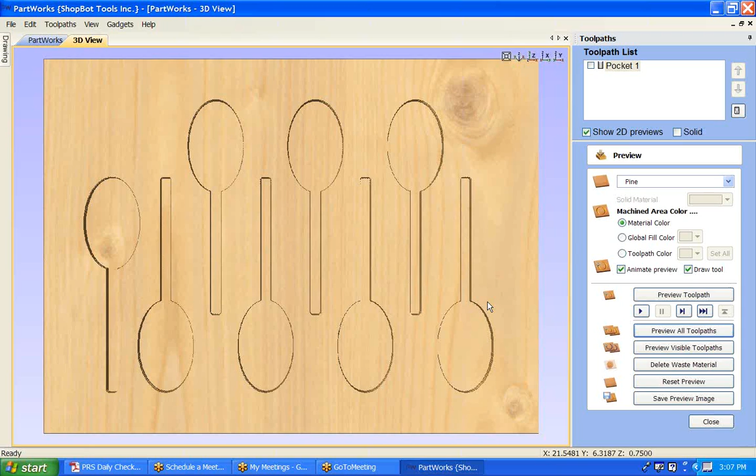The only thing is, when you do this and make this pocket, you might have to come in here and do a little bit bigger offset, because it's going to cut it so exact that your parts might be so tight you'll have a problem trying to get them in and out. So you might want to come in here and when you make your parts, offset them out just a little bit.

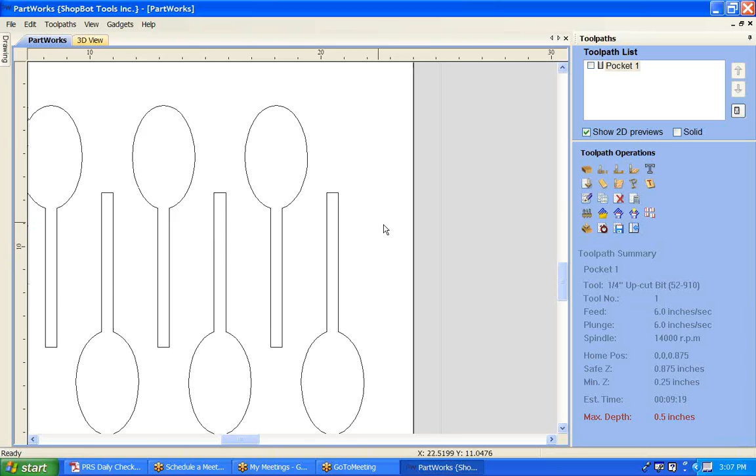I make jigs like that, a holding device. A fixture is like a holding device, that's really all it is. It's a clamp that goes around and holds parts in place.

We've got a lot of examples. If you go into Google and type CNC fixturing or jigging, you'll see plenty of examples of that.

I think I'm still missing this. Somebody wanted something about some tool pathing.

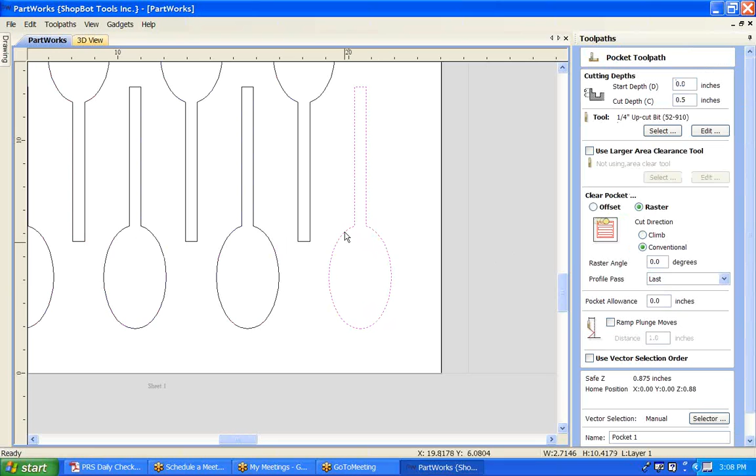Bidirectional cuts, what do you mean? I could set each tool path and give it a cut, do I want it to cut climb or conventional? Maybe some of these I want climb, some I want conventional. I'll have to grab each one individually and do it. Let's say I wanted certain ones, these four, to have a climb cut, I would set them as climb. I'm not sure, sorry, I missed your question, if you wanted to retype that one.

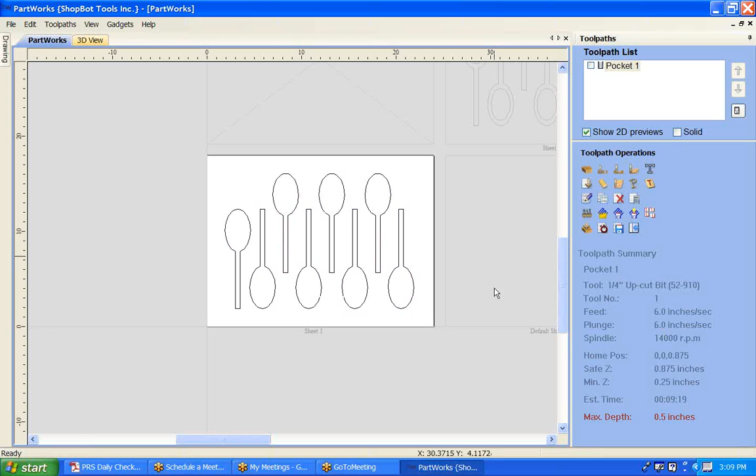We have a guy who makes bar tap handles who came down here, and every single one of his bar tap handles is the same, it just has something different pocketed in here. So he makes a fixture and sets them in there, then just pockets out exactly what he wants to put in each little groove. The generic part stays the same.

So, anybody else got any questions here? Type them in. Oh, here's one I missed.

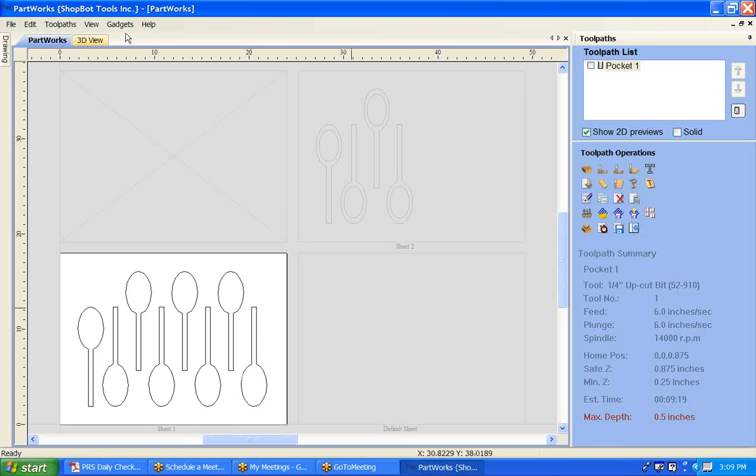You get way out here and think, where the heck is my drawing screen? I've lost it. If you hit F, that means full screen, it goes right back to full screen. So F is a good command, and again, I just found that in help and help contents.

Alrighty. Maybe the bidirectional cutting guy is the one that left. Oh, I feel bad. All right, anybody else have any questions?

What is the best way to zero a ShopBot Buddy? Well again, it's going to come down to what project you're doing. If it's something 2D like this, it might be best to just zero to the machine base. On your Buddy, the surface comes with a 1-inch piece of Extira, a man-made wood, 1-inch thick, exterior grade, it can get wet, and it's supposed to be real stable and not warp. So I'd probably just find a spot in the middle of it someplace, and go to that same spot and zero it every time, using the Z-zeroing plate, since the software already has the thickness of that compensated in. That's what I'd recommend on the Buddy, just find a good spot in the middle of the board so that if it's warped at all, that's taken into account.

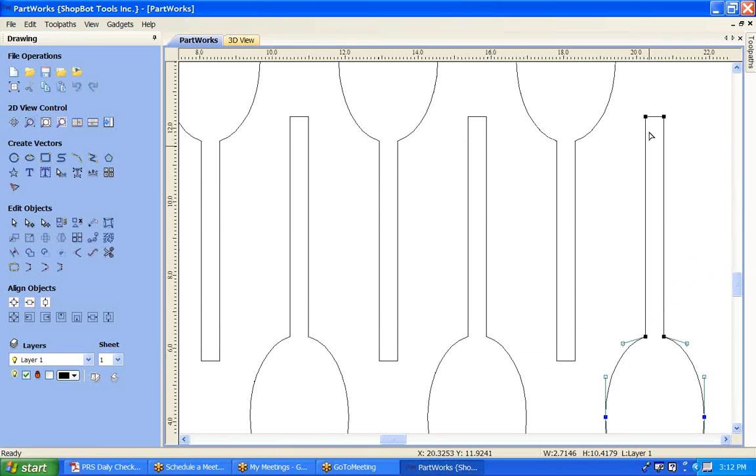Start points and toolpath. Right now, if I went into node editing and selected these, I can see where the start point is. The start point's out here, right in the middle of the spoon. Maybe for hold-down purposes, I want the start point to be in a different location. I can come over here, right click, and make start point. The rest of them here are all at the top of the circle, so if we go in here to toolpath these...

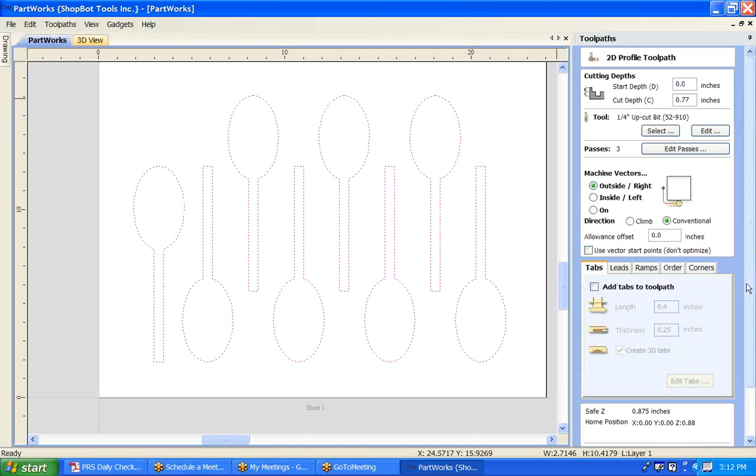I can reset my preview, and if I want to run this step by step, it's now running it. Well, it's not going to show in the 3D I guess, but your start point is where the bit enters and exits the cut, that's all that is.

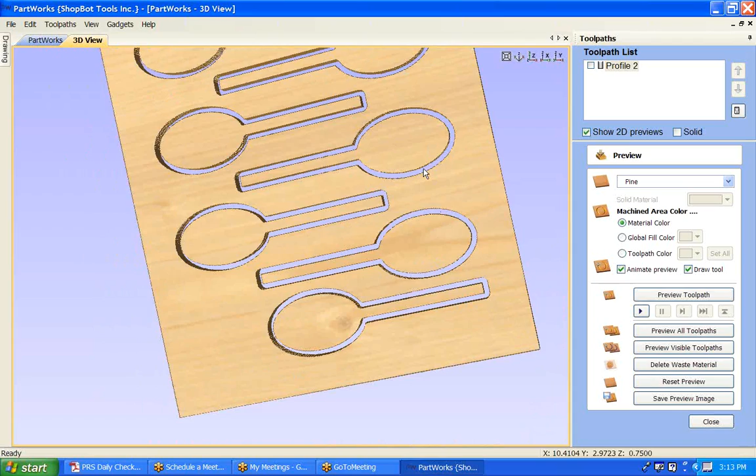Sometimes when your board material is really filled up and there's not a lot of space left, it's nice to stagger where your start points are, to help keep the material from losing its hold-down. The computer will generically give you a start point, but you can come in and be specific and tell it where you want it to actually start.

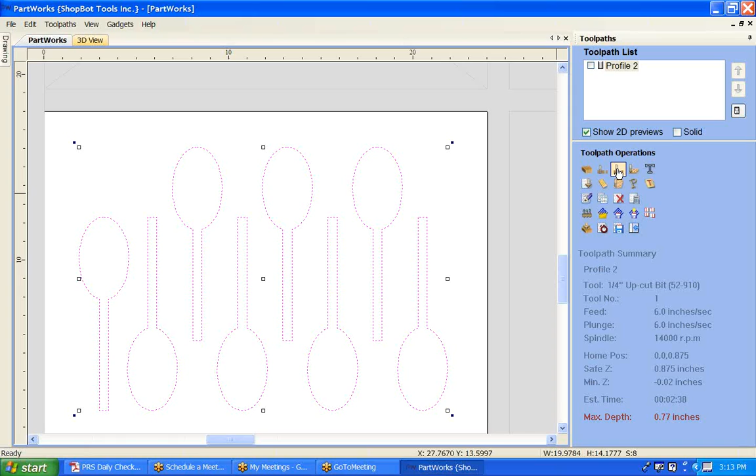All right, anybody else here? Anybody have any suggestions for next time? Slow things down a little bit, quit stuttering, quit saying so many times. Well, what do you got for me? I need feedback, keep me from getting a swelled head over here. More trainings, less trainings, give it up altogether.

Tell me not to quit my day job.

For 2013, I've got trainings scheduled for the first few months to do 2 a month, which is more than we've ever done before. Luckily I'm in a position right now where I'm able to do that.

So I'm going to give it a shot. But I only come up with so many ideas, and these get to be the same tiresome trainings. Maybe you want them a different day, different format. Actually, they're probably going to stick around Wednesday at 1. But if you want them in a different format, maybe more with a video camera out in your face on the machine, squaring up the machine, what is a C3, C2 sort of thing?

Would you rather see a camera than the PartWorks going on in the background? I can do that. I'm looking into getting a camera and recording some actual footage on the machines themselves, so you get as much out of it as squaring up the machine.

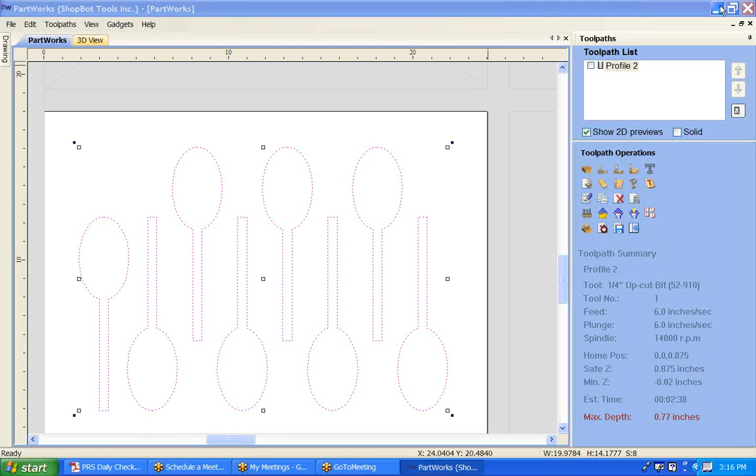But I will tell you, I love going to this Vectric site and using some of their training tutorials they have. I really want to emulate what they do into mine, because I think it's just so well done and professional, and such a fan of their software. That's all I use anymore is this.

Again, you just go into Vectric, go to support, and right here's the training material. They've got 3D stuff for Aspire and 2D, just doodle along. Have another monitor, watch these go through step by step. You'll really, if you actually did do it - it took me the first few months here, I was like 'I'll figure it out,' but I actually sat down and started doing these.

It really just makes you start going so much faster and more efficient. And that's kind of what this whole training was about today, which is some of those little tricks and tips that you've forgotten over time, or have had thrown so much at you at one sitting that you weren't able to write it all down fast enough.

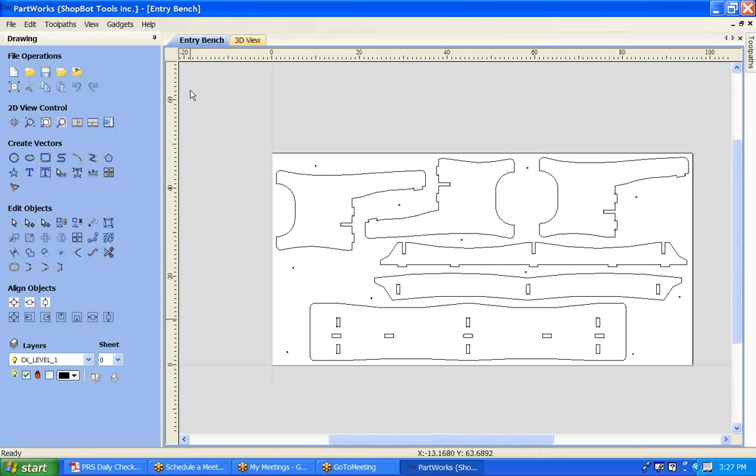So there it is, and you can see all these little screws right here, all these little 1/4 inch holes, that's my hold down. So what I did is I drew my entry bench in there, and then I went around and drew all these little 1/4-inch holes in places that I knew were safe, away from the evil 1/4-inch cutter that would chip up and break my bits.

So when you see I toolpath it, I actually have a hold down toolpath. What this does is it drills a hole 0.05 down, so this big full 4x8 sheet laying up there isn't going to go anywhere. I just run a hold down toolpath and have it drill 0.05 down. That's an actual drilling toolpath, it goes down 0.05 and comes back up. I mean, that's what, the thickness of two or three business cards, so it's not going to move the thing.

Then I move the gantry out of the way, run screws into all those holes, and then I profile. Then I run my profile, my pocketing, my profile. So there's your hold down, there's your pockets, and then there's your profile.

And then again, everything is tabbed. I use a tab that's just so minimal that it holds the part there, and I can just nip it out with a utility knife. My tab size is 0.6 and 0.33 on this one. I've actually got it down to about 0.44 and 0.22, and that works great.

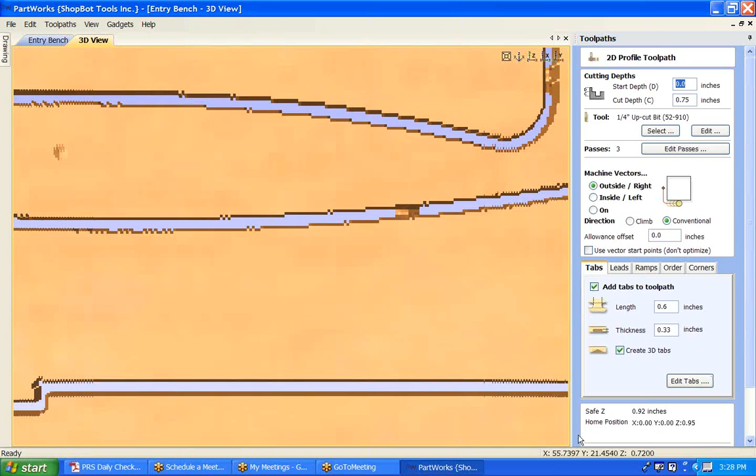So yeah, hold down. If you go and download any of those documents off the internet of mine for that entry bench, you'll see how the hold down actually works. Let me zoom in on one here. So there's that bench. It's showing you how the tabs are removed, how to put it all together, and how to hold it down. All that stuff's on there.

So, yeah. What else do we have here? What do you use for hold down?